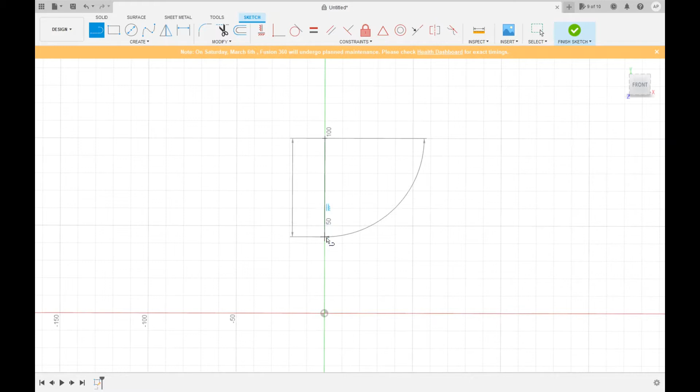To start, we'll create a component. We'll just keep it as component 1, then say OK. I'll create a sketch on the YZ plane, and then create a line that goes from the 100mm line down to the 50mm line, and this will be a 50mm line. Actually, if you want, you can put this down 60mm to give us a little bit longer tube, then click your check mark, and say finish sketch.

Now we'll go up and we can either use the command in here or the hotkey over here. Once you open up the pipe command, you can select this path here. You'll see it automatically gives us a dimension for the diameter and everything else. We want to keep the section sizes circular because we want this to be a pipe.

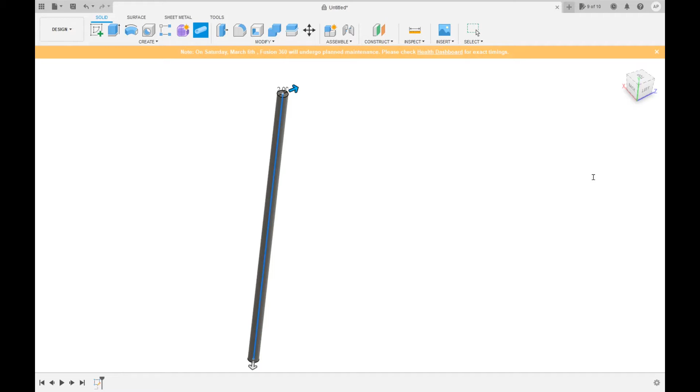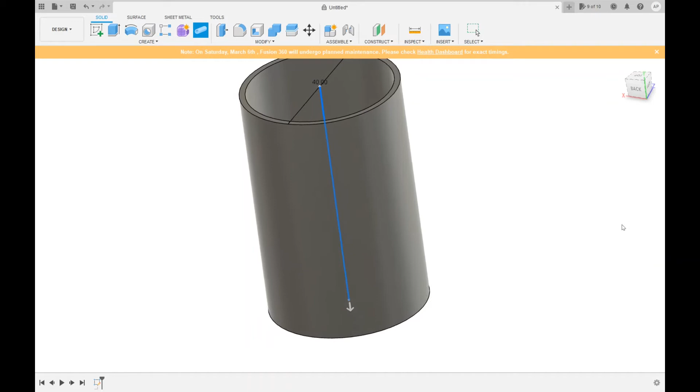But our section size we want to be 40mm, and we want it to be hollow, with the section thickness at 1.5mm. Now we'll set this as new body, and say OK. Make sure that when you click this body, it does pop up under component 1.

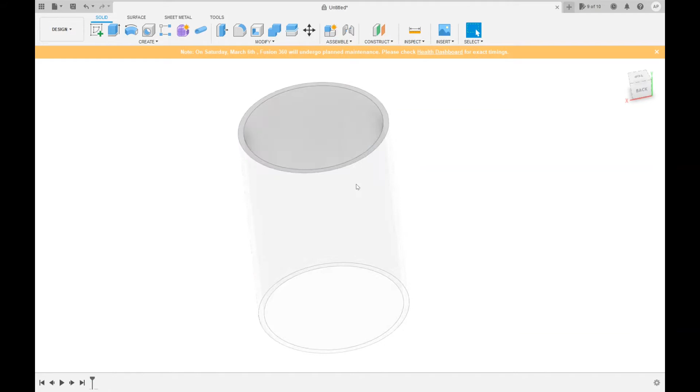Now what we'll do is create another component, but we need to remember to set the body to our workspace, the parent, to our workspace, and say OK. Now we need to create another tube, so we'll go to our create sketch function and go on the YZ plane.

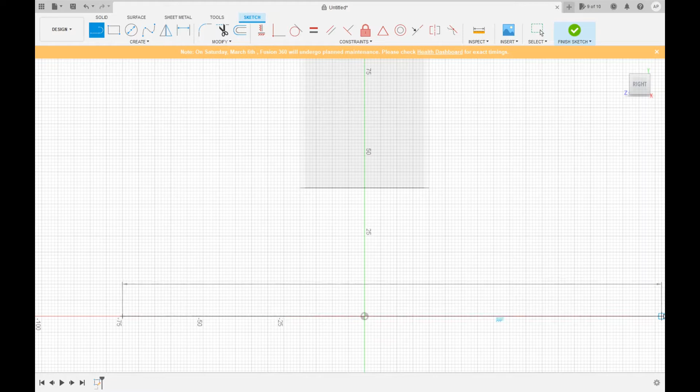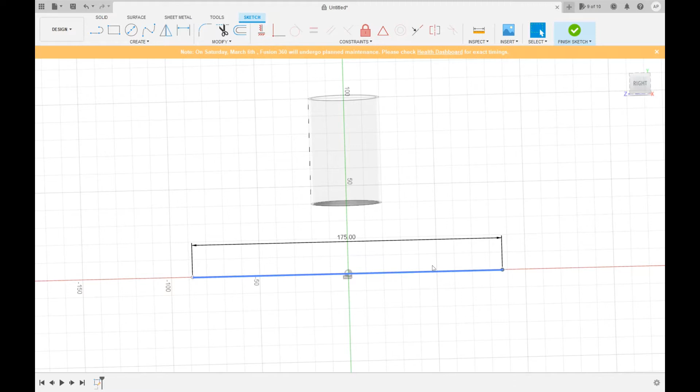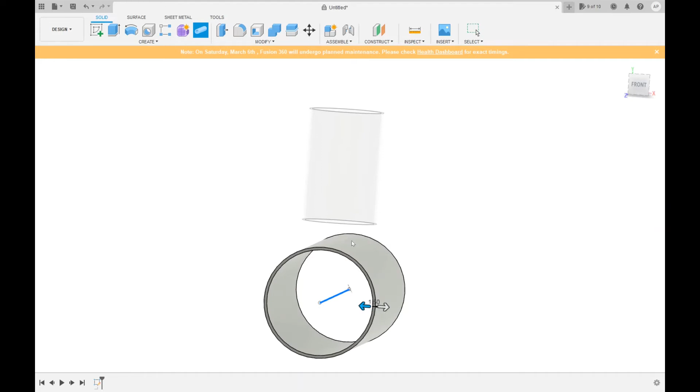Now I'll create another pipe that's along this path, but the section size needs to be about 60mm, or go up until the pipe actually intersects the other pipe that we have there. So we'll go up to 100mm, and we can see that that intersects. Now we'll set this as new body, set it as hollow, make sure the section thickness is 1.5, then say OK.

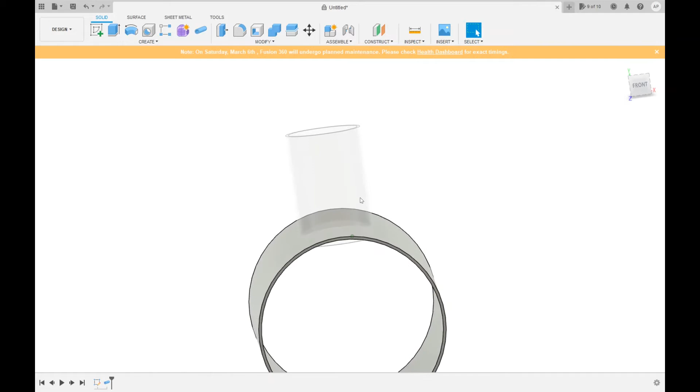Now that we know the diameter of this is 100mm, we'll hide this component, activate our first component, and then create another sketch on the YZ plane, which is a center diameter circle of diameter 100mm. Say enter, and then say finish sketch.

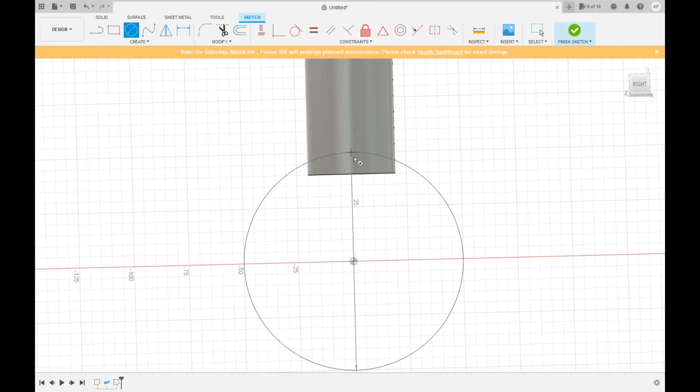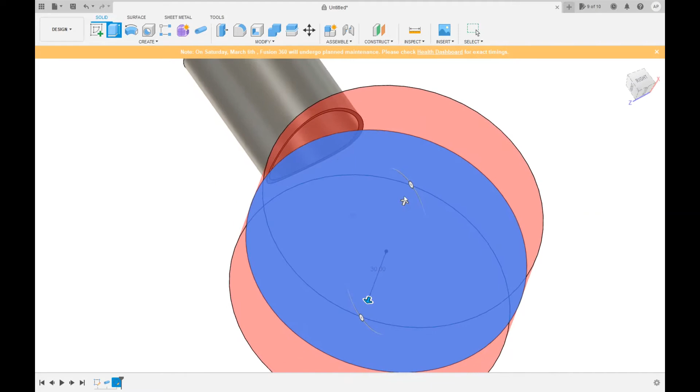Now we need to extrude this, and on the direction you want to say 2 sides. Extrude this out to one side, and then out to the other. Now you should have a cut function similar to that, and say OK.

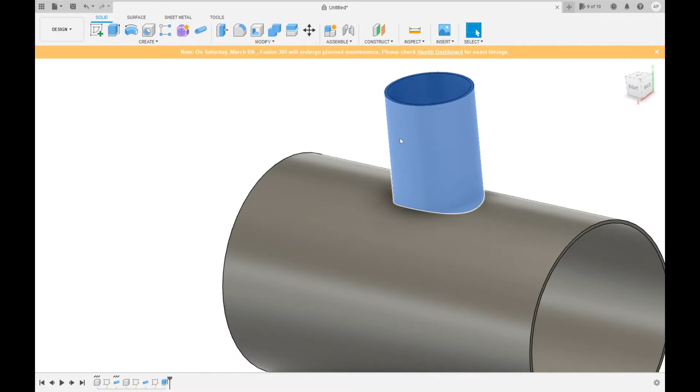Now we can show our other component. If we activate our workspace, we can see there were some orientation issues, and we can solve that by going into our component 1, selecting this body, right-clicking, saying move or copy, and then rotating along the y-axis 90 degrees.

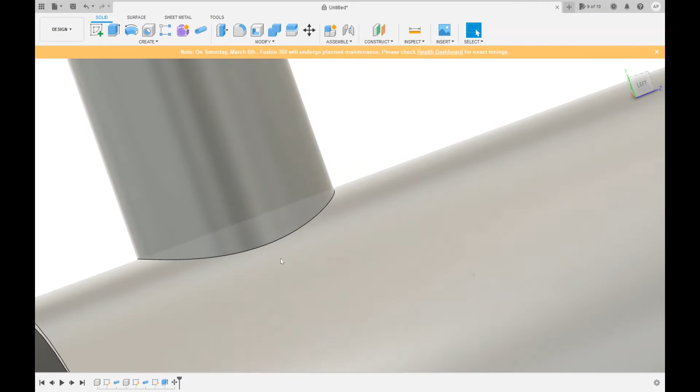And then we can say OK. Now with that done, you want to check and make sure that the line at the bottom of this tube is showing on all places. So now we have that. This will create a flush connection between these two cylinders.

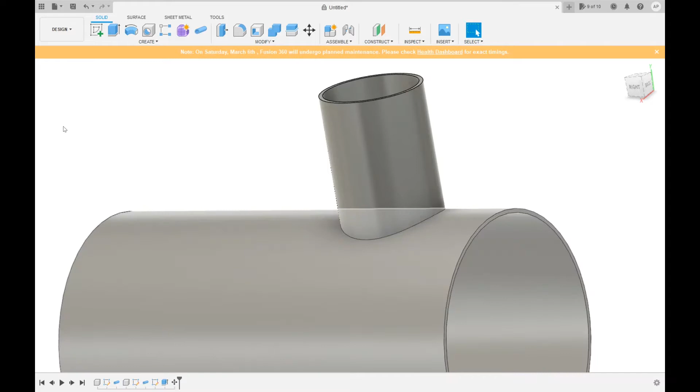Once we have that, we will hide our second cylinder, that is the larger tube, and we'll actually put a small bevel on the outside edge of this. So what you're going to do is select the outside edge, go up to your modify toolbar and select fillet, or however you want to pronounce it. I'm not exactly sure what the pronunciation is, but I prefer to pronounce it fillet.

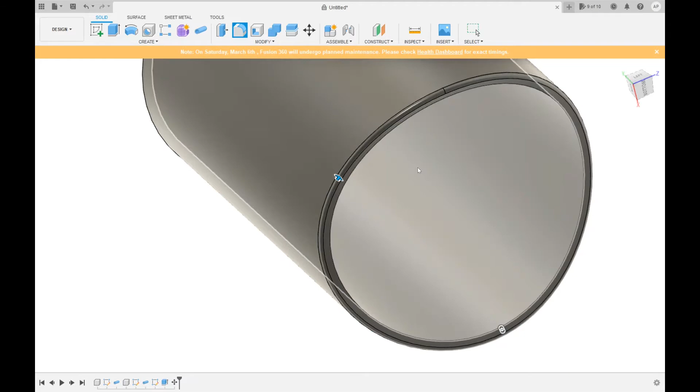And you can put this as 0.5. This will create a nice fillet that will give you a nice aesthetic appeal, but it won't disturb the appearance too much. Don't change anything else, and then say OK.

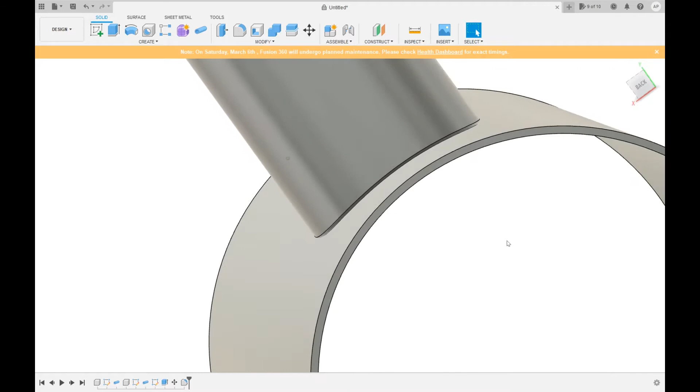Now we can show our other component again. You can see there's a little bit of lifting there, which is good, especially if you go to weld these two components together and you want them to connect. This is a very good technique because it allows you to have some space between the first tube and the second tube where you can put some welding material in.

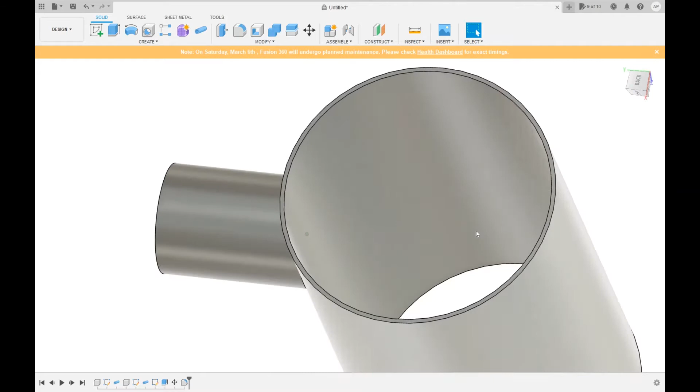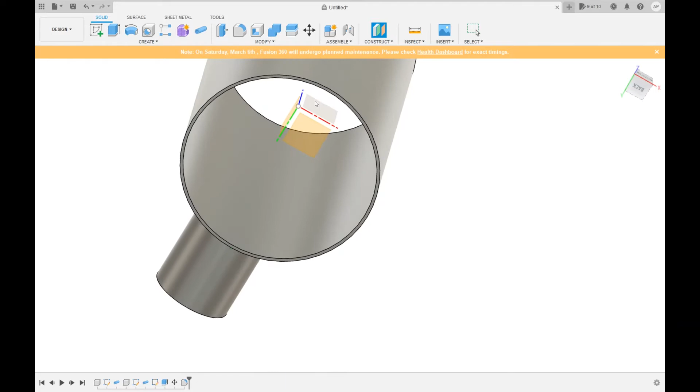If you wanted to connect these two tubes, what you would do is make another sketch along the XZ plane, but before you do that, you need to construct an offset plane from that XZ plane that's going to go up, and it's just going to rest on the top of this cylinder here at 50 millimeters. And at 50 millimeters, you can see that plane is tangent to this first cylinder.

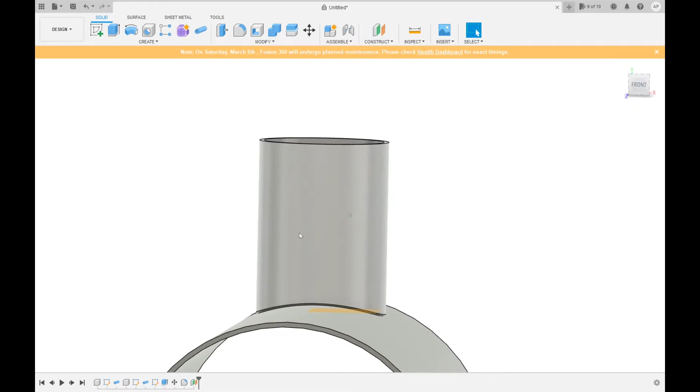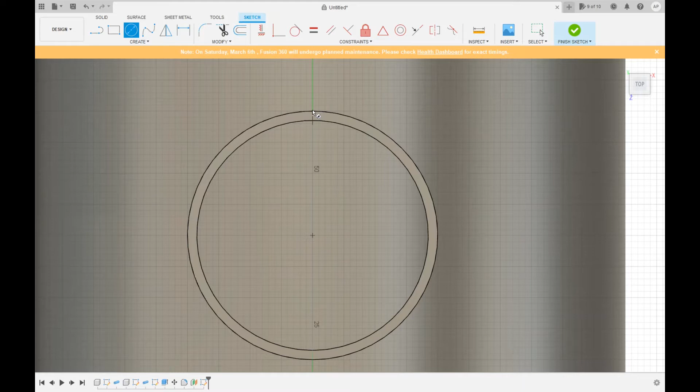Now we'll say OK, and then we'll create a sketch along that plane. That will allow us to create a center diameter circle at the center here, out to the outer diameter here, which, if we remember, we set to be 40 millimeters. And we know the thickness is 1.5, so we do 40 minus 3, which is 37 millimeters, giving us the inside edge of that cylinder. Then we'll say enter, and finish sketch.

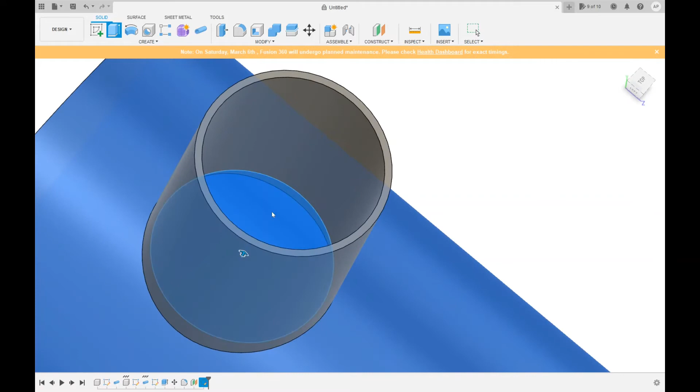Now we need to extrude that sketch, and the start is going to be from an object. The object we're going to select is our body here, and the profile is going to be our circle there. We want this to be a cut function, and immediately when we scroll that down, it'll set as a cut function. Make sure you have this cut all the way, and then select OK.

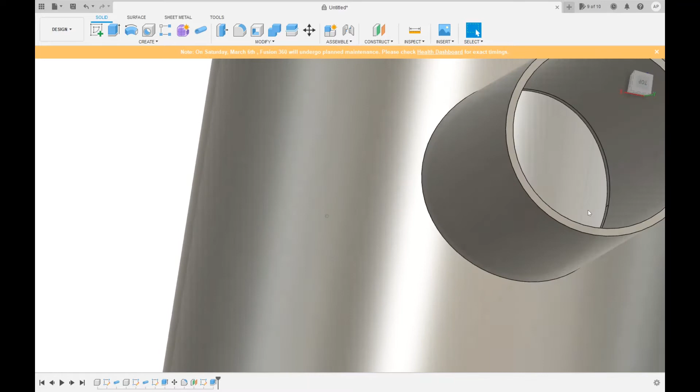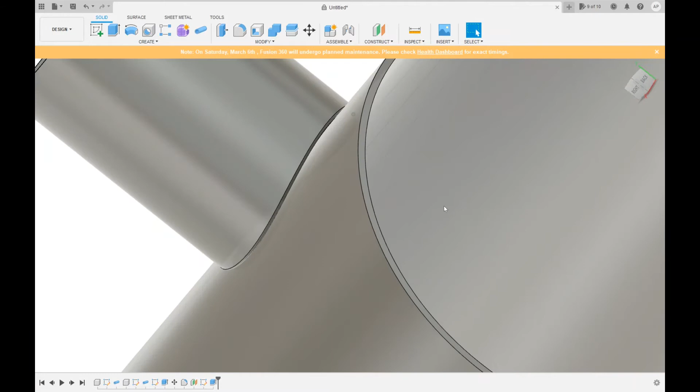Now with that, you can see we have a hole cut on the inside here that goes flush to our first tube that we have set up. It's a circular hole that goes along the curved path there. We have some material that we can put in there, and this is all flush, and that is a good way to do pipe notching in Fusion 360. There's not a specific algorithm that you can use, as far as I know, to do pipe notching. It really is a little bit of eyeballing and a little bit of knowing a certain technique to do it.

And with that, we'll move on to creating some standard objects. The requester did specify angle beams, channel beams, and I-beams. Angle beams are basically just right angle beams that extend out. Channel beams are basically a U-shaped pipe, or kind of a half box shaped pipe that has an open top. And then I-beams are basically shaped like the capital letter I, and then that's just extended out.

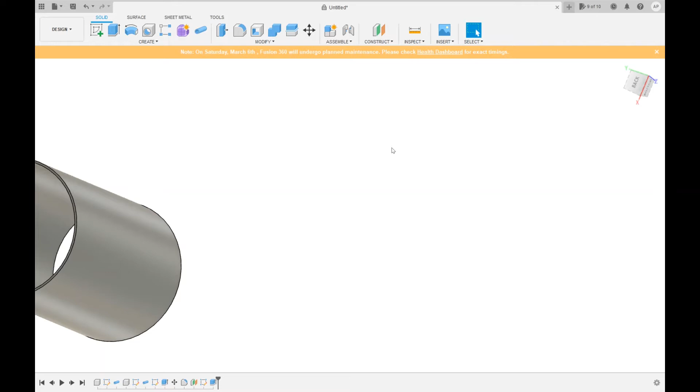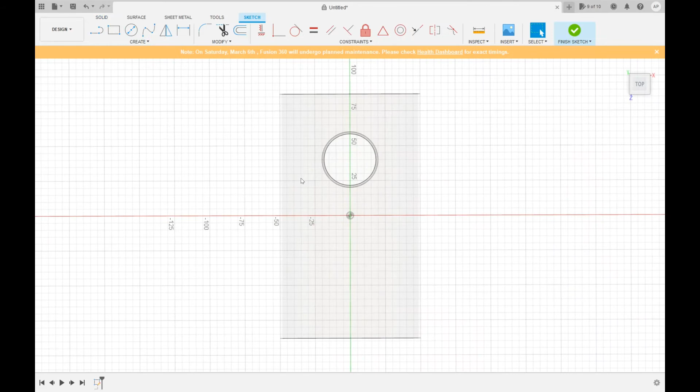So to begin, we'll create a new component, and we need to remember to always select our parent to our workspace unless we're creating subcomponents. And then we'll say OK. Now we'll create a sketch along our XZ plane, and we'll go out a bit. Again, you can move where you are in your work plane while you're doing a sketch.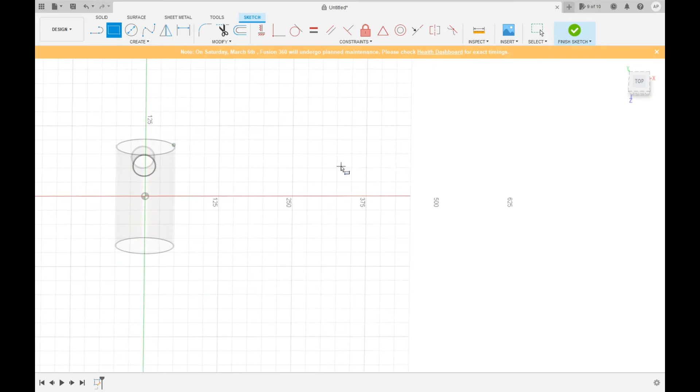So that will actually create two 2-point rectangles, and we'll make these not terribly big, and we'll just set them. The width needs to be 5 millimeters, and the length can be 150 millimeters.

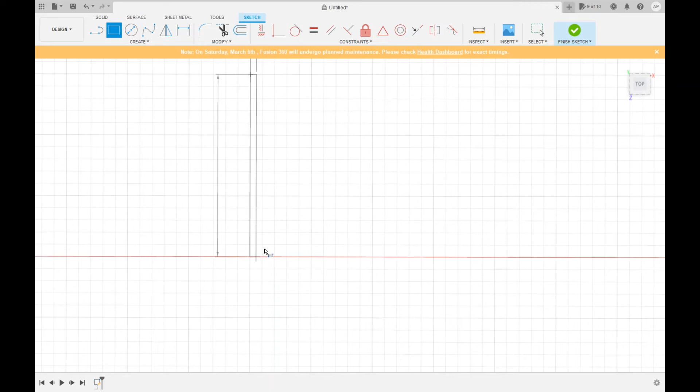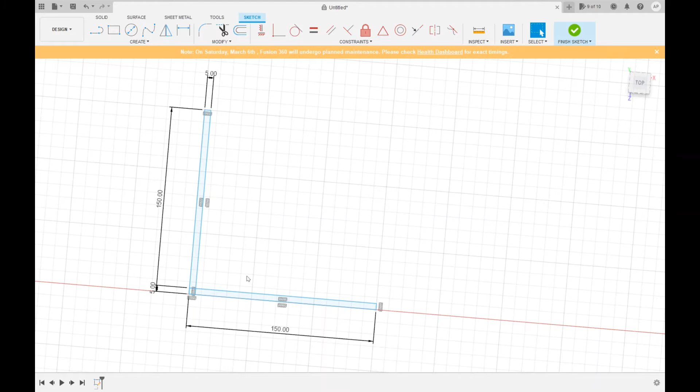And then we'll say enter. Now we need to create a replica of this, so we'll create another 2-point rectangle. We'll set this at the base of that. We'll set the length to be 150 and the width to be 5.

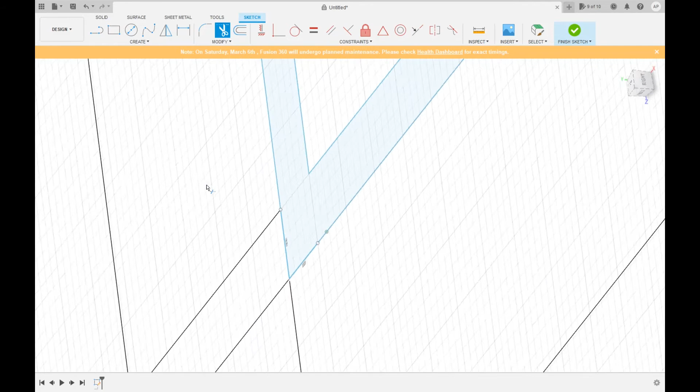Then we'll press enter. Now what we need to do is trim the inside of those two sketches where they intersect. The way we're going to do that is zoom in on those two sketches, use our trim tool, and just highlight over those two edges there. Now we'll say finish sketch.

And we'll actually use our extrude function, very easy and simple, and we'll just extrude this upward. This can go as far as you need. We can make this even up to 600 millimeters, or 700 millimeters is fine there. We'll say new body, and we'll say OK.

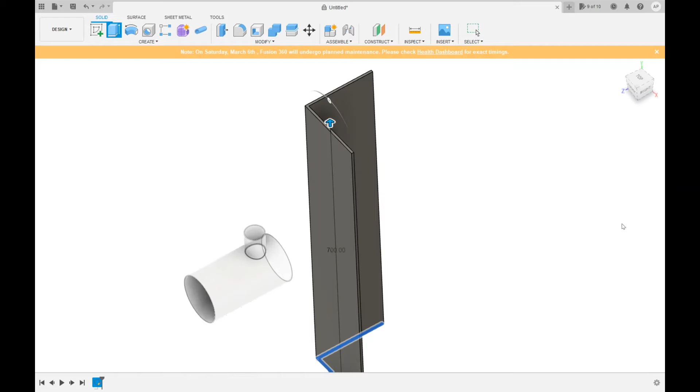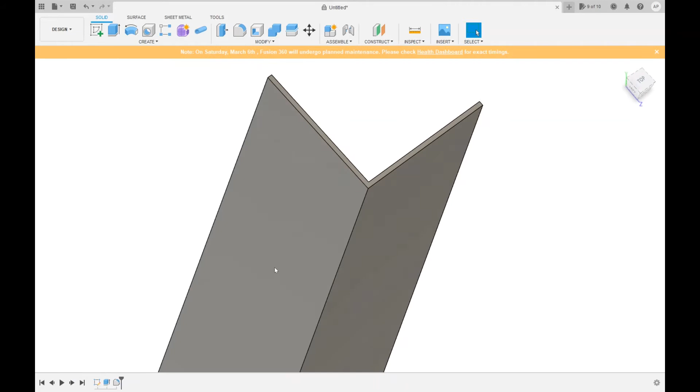Now, one thing that's common with a lot of these beams is that they have a softer inner edge, and the way we can do that is we can select that edge, use a fillet, and set that to 0.5. And then we'll say OK. This gives us just barely a smooth edge on the inside there, and you can do that all around, but this is essentially what an angle beam is. Not a very complex shape at all.

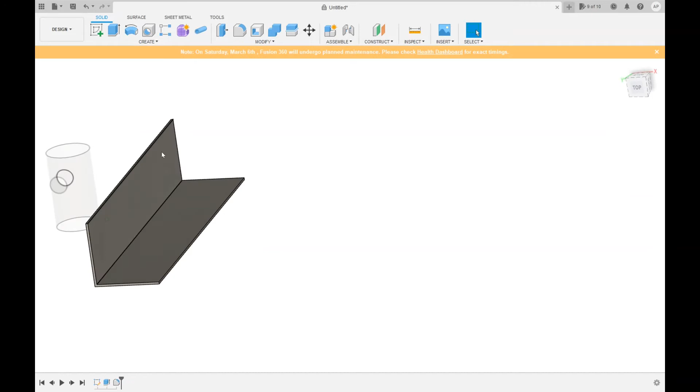And now if you'd like, what you can do is either use this object to make a channel beam, or make a new channel beam. What I want to do is create basically a replica of this. So we'll create another sketch along the XZ plane. We'll go out a little bit, go again to our top view, and create a 2-point rectangle.

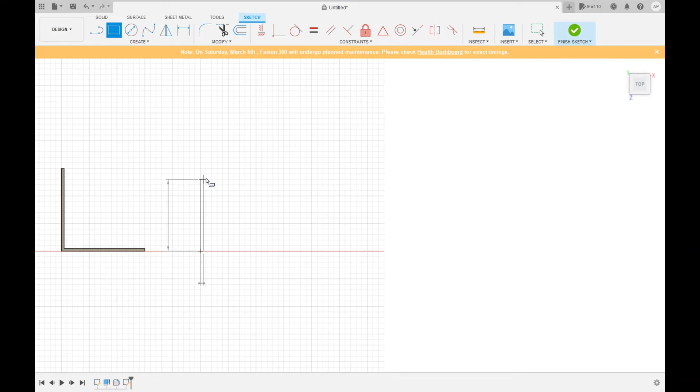We want this to be 150 by 5, so we'll set that to 5, and this to 150. We'll say enter. Now we'll zoom in a bit for easier viewing. Then we'll create another 2-point rectangle going along 150 by 5. Press enter, and then create the final 2-point rectangle, 5 by 150, and press enter.

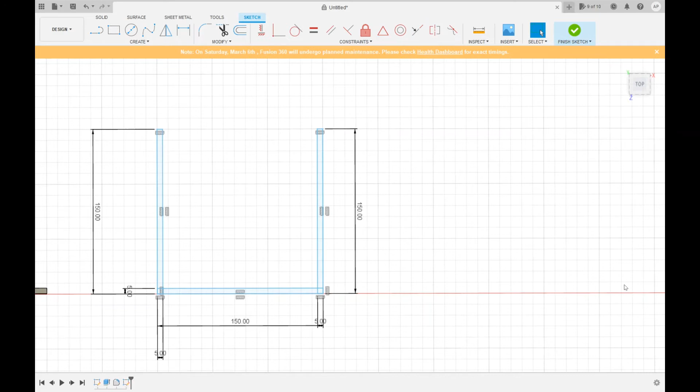Now use the trim feature to trim away those inside edges. And don't worry about the errors that you get. Those will come up just in standard operation, because Fusion 360 doesn't really know what we're doing.

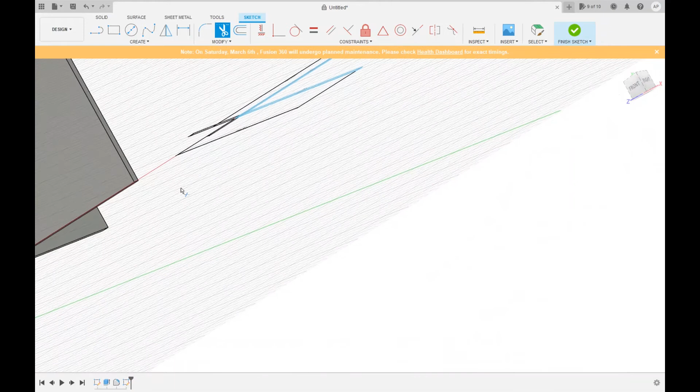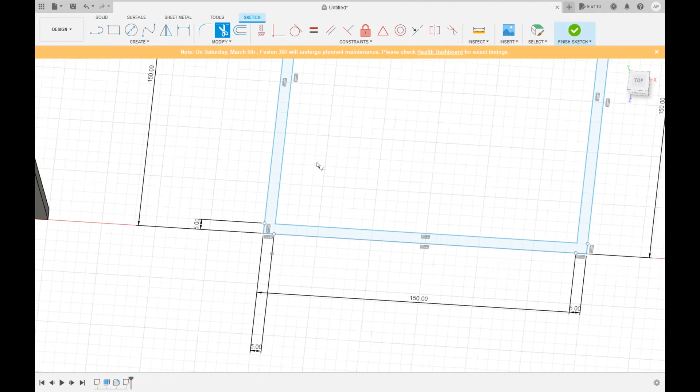And one thing you're seeing here is a disorientation of your viewing port. The way to solve that is just to go back to your home view and then zoom back in. This does happen frequently, and honestly, no matter how well trained you are in Fusion 360, it happens to the best of us. So if you encounter an error like what just happened, just remember, go back to your home view, and then go from there.

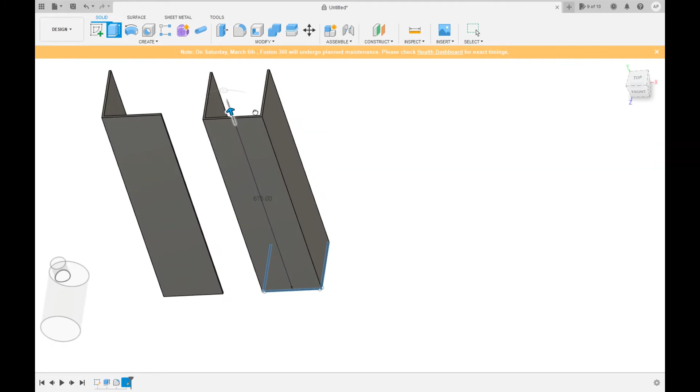Now with that, we can finish our sketch, and then we can extrude. Our profile is automatically selected. We'll just extrude this upward, the same thing over here, to 700 millimeters. I will say OK.

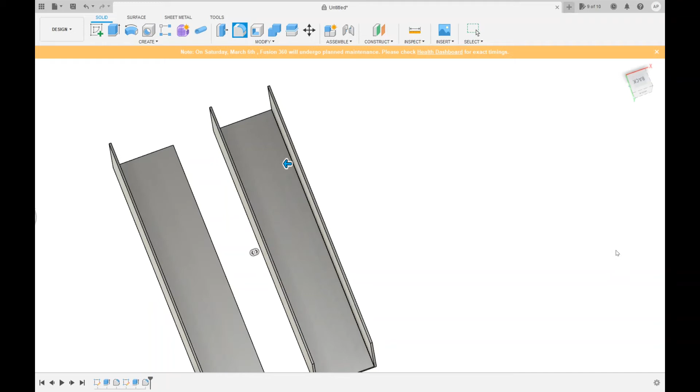Now we can bevel both the inside edges at the same time by selecting this edge here, and then shift-clicking on the other edge. Now use your fillet tool and go out to 0.5 millimeters, and then say OK. Now you can see on both our inside edges, we have fillets.

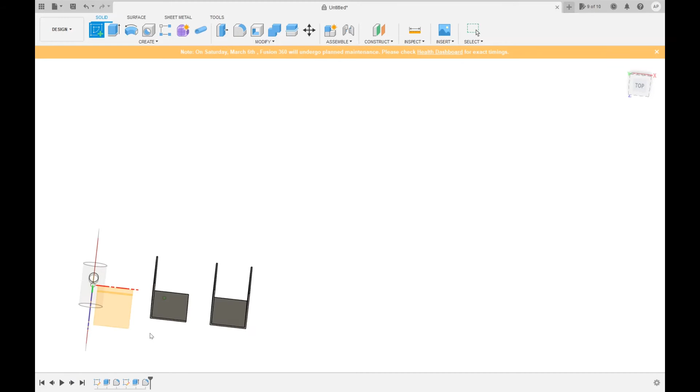Now we'll create the I-beam. The I-beam is a little bit more complex of an object, but it's still a very standard object that's easy to do. So we'll just start again by creating another sketch on the XZ plane. Go out to the right. Again, make sure you're on your top view.

Now you're going to want to create a 2-point rectangle, and you want to give yourself a little bit of space here. Now place the first corner there. Make sure the length is 400 millimeters, and the width is 10 millimeters. And press enter.

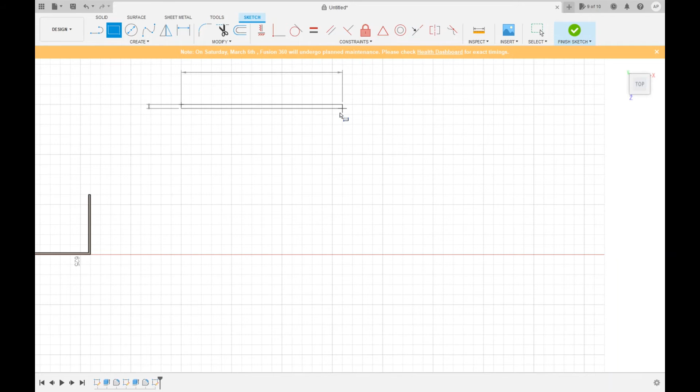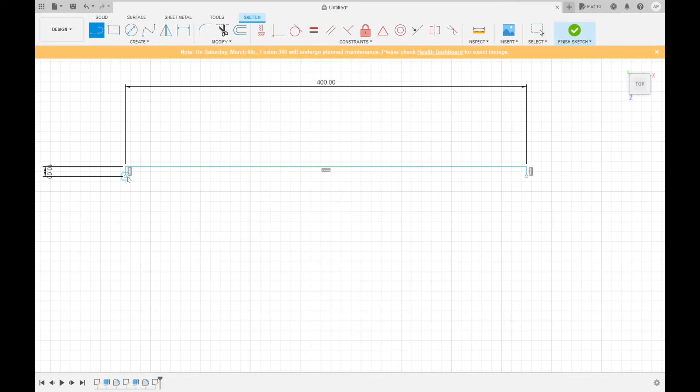Now you're going to want to make sure you're always on your top view and well zoomed in for this part. Now you want to trim this edge here, and create 2 lines going down at a very, very shallow angle of about 3 degrees, or 3.5 degrees. But we want the length to be out to the midpoint here. So we'll go here and set this to 3.5.

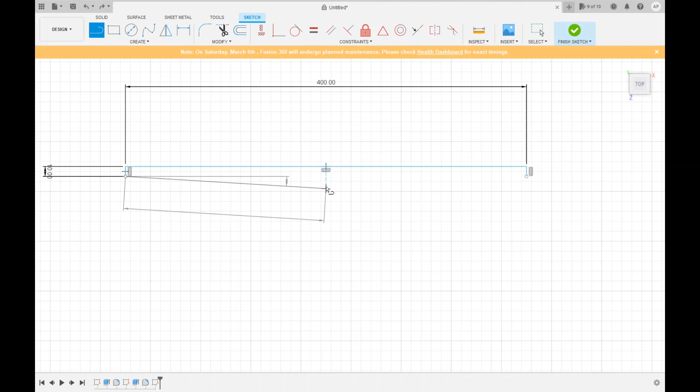And we'll undo this because it did get a little bit malformed. That's easy to fix. We'll just go again and make sure the angle is set to 3.5 degrees, and then go out to the midpoint, which will automatically snap to the center there if you have snap set on your sketch palette. And then you just go back up to this point here, and that'll make an exact replica.

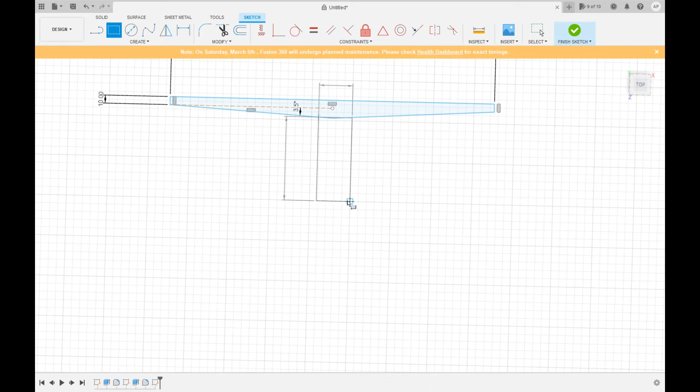Now we want to create a rectangle going down. So we'll create a 2-point rectangle that's on this point, and then we'll go out and down. You want to go down all the way to the base here. And then we need to fix some errors here.

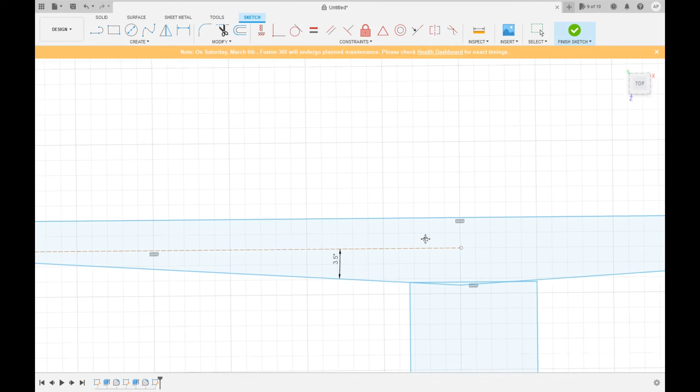And sometimes you do need to switch between perspective viewing capabilities. You want to switch between pan and zoom when you're making specific viewing corrections.

You can close the sketch palette for now. But what we want to do is set the width between these 2 points. So we'll create a sketch dimension between these of about 35 millimeters, and we'll say enter.

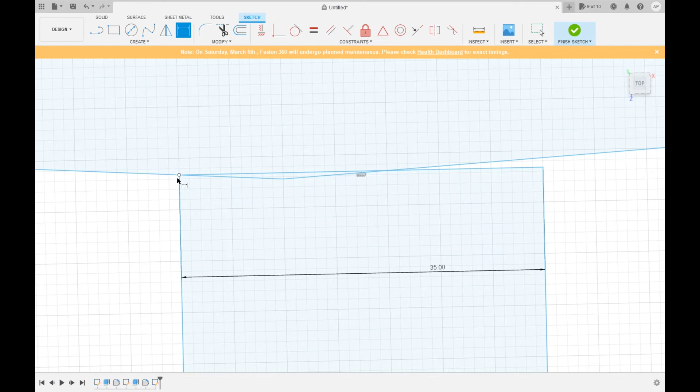Now with that 35, we know that we want the distance between these 2 points to be 17.5 millimeters. So between the corner point here and this point here, we want it to be 17.5 millimeters. And we'll say enter. Now we know that this is centered.

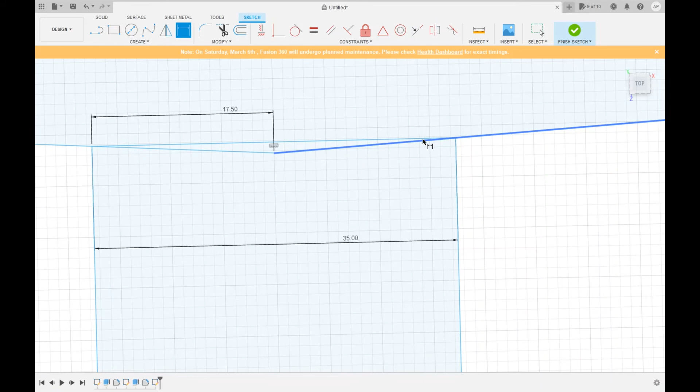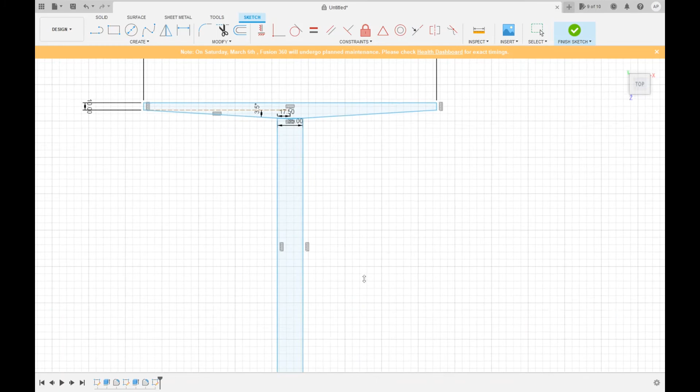And we always want this to be along this line, which is fine. It will automatically select when we did our initial sketch. Now we can go back to our top view and zoom out a little bit, then pan around. Make sure that everything is how you'd like it to be.

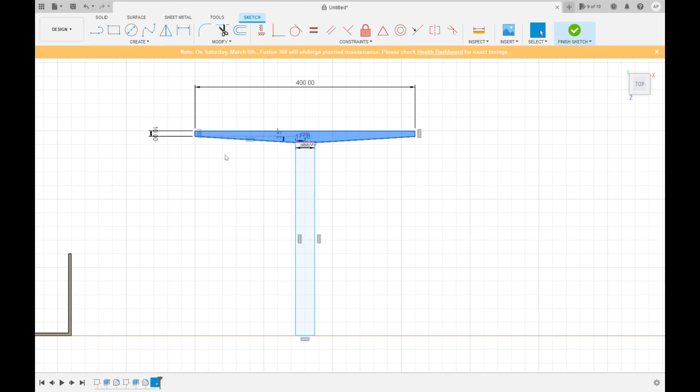And now what we can do is we can select this object here, say move or copy, or just go and say Control C and Control V on your keyboard, and that should make a copy. If it doesn't, what you can do is just make an individual face of itself. And all we're going to do is just repeat the process that we did previously.

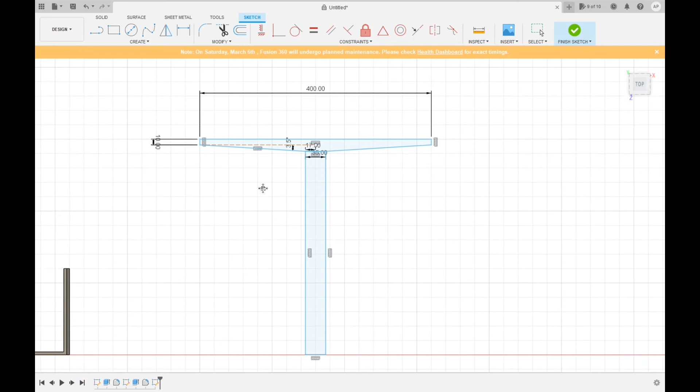Fusion 360 is still going through some updates recently, so some features that may have been available before are not available anymore. But that's really not a problem because you can just do everything by hand.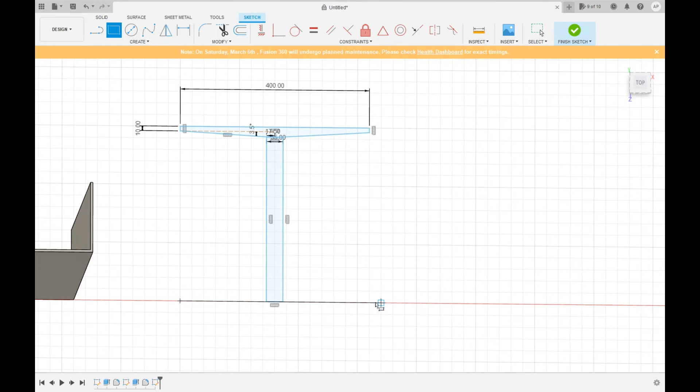So now again, we'll create a 2-point rectangle, 400 millimeters on the width, and then 10 millimeters on the length, and then press enter.

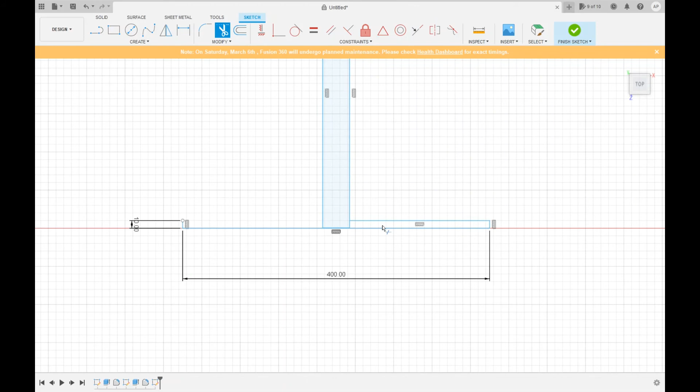Then make sure you delete the bottom face here. Make sure you delete all 3 sections, because we have this rectangle here, it's going to want to split that up into 3.

Now you need to create a line. It's going to go to the midpoint there. And make sure that you set the angle to 3.5 degrees, and then shift this out until it snaps to the center.

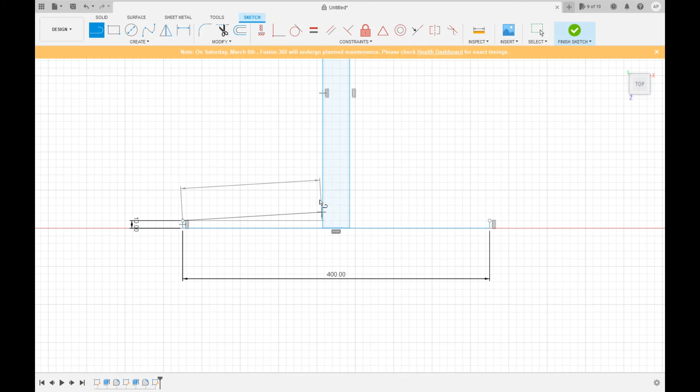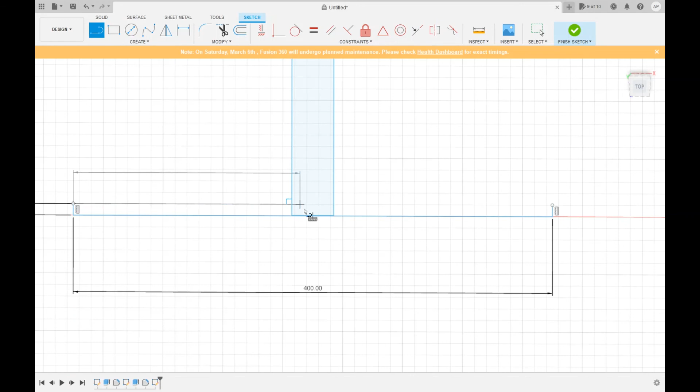If this is not snapping to the center, all you need to do is press escape and then create the line, and instead of creating the angle first, go out to the center and then set the angle to 3.5 degrees, and then it'll automatically snap again.

Now say that, and then create a line back to that initial point over there. Then press escape to exit out of that tool.

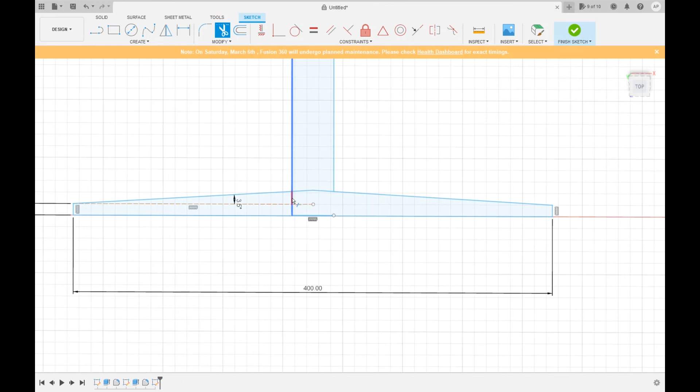Now we need to trim off the edges here so that we have all of a flat shape. Make sure again that you trim off the edges in all places that are on the inside because we want this to be just one face here.

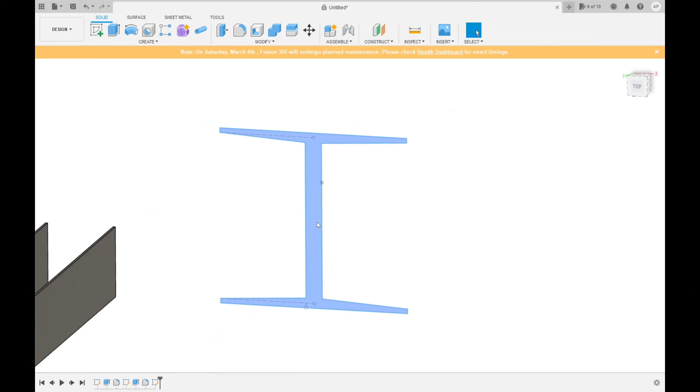Now open up your sketch palette and say finish sketch. And now we can extrude this outwards. So we'll take this and we'll extrude it out 700 millimeters like our other shapes, and we'll say OK.

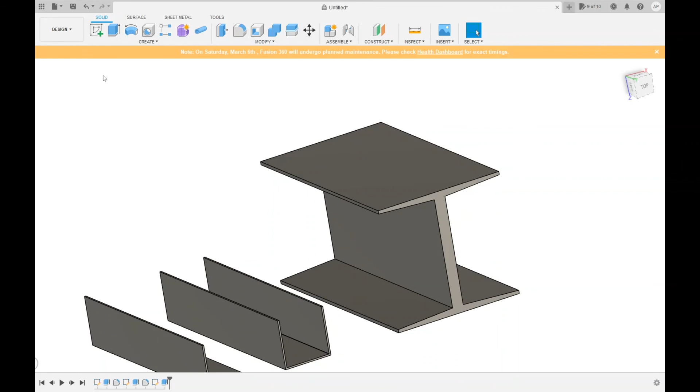Now you can see you have some standard shapes set up. You have an I-beam, you have a channel beam, you have an iron beam, and then if we activate all of our components, we have the pipe notching. The pipe notching is honestly one of my favorite things to do. It's really cool to see pipes line up like that.